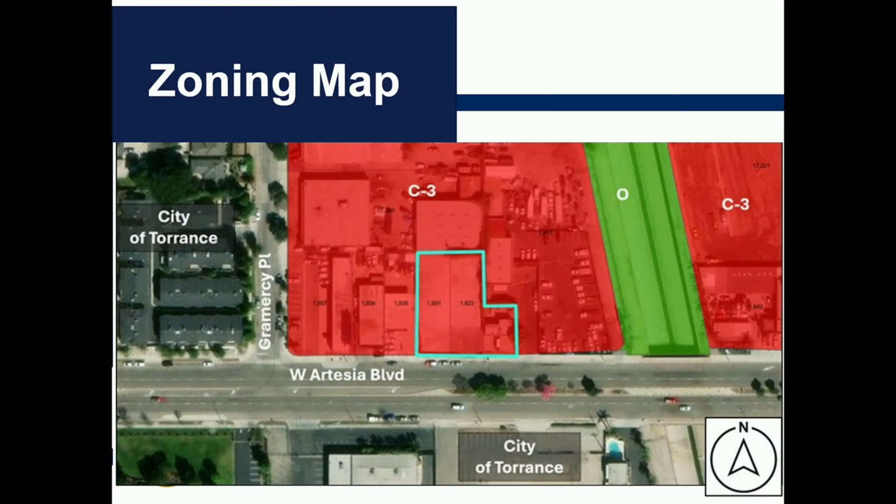The map here shows the zoning map, and outlined is the subject project property. As you can see, the site is located in the city's C3, that's the General Commercial Zoning District, and is surrounded by the same zoning designations on the north, east, and west. It should be noted that on the south end adjacent to the property is West Artesia Boulevard, which falls under the jurisdiction of the City of Torrance.

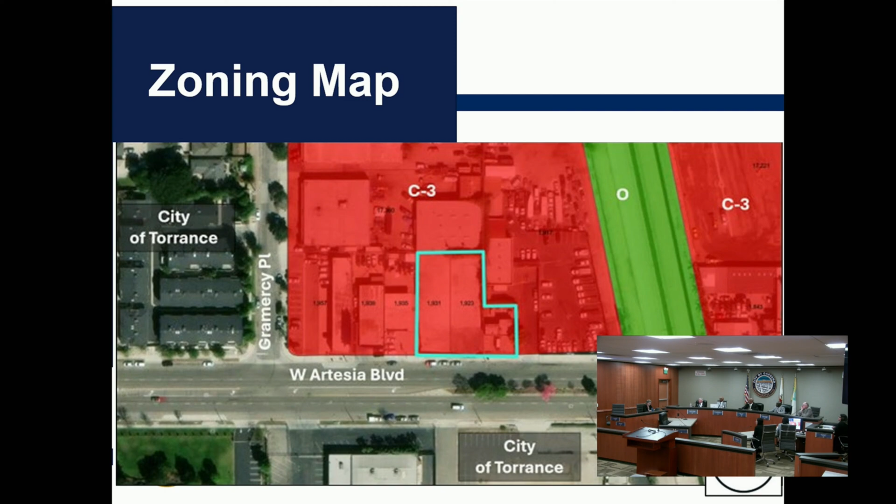So again, the proposal tonight is for a new facility located just west of the current location of the existing facility, because due to the continuous need for the operations of the facility, the proposed upgrades would need to be located nearby. So 1931 and 1923 are the locations for the new facility.

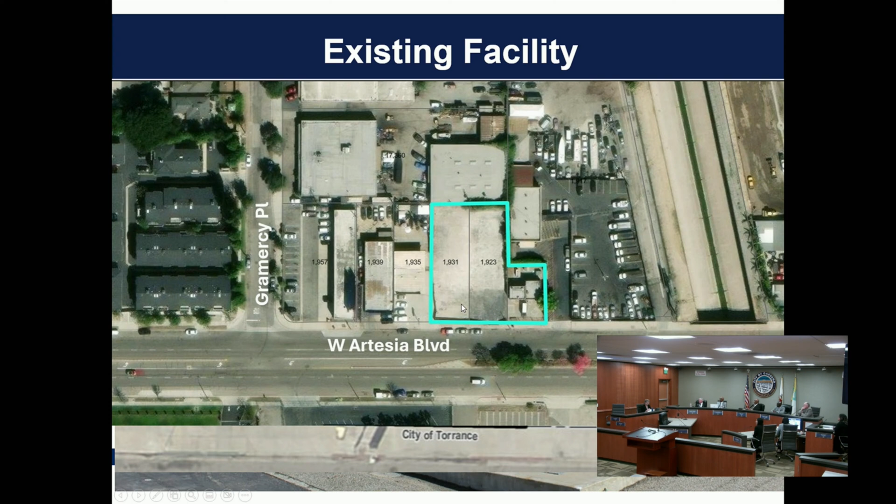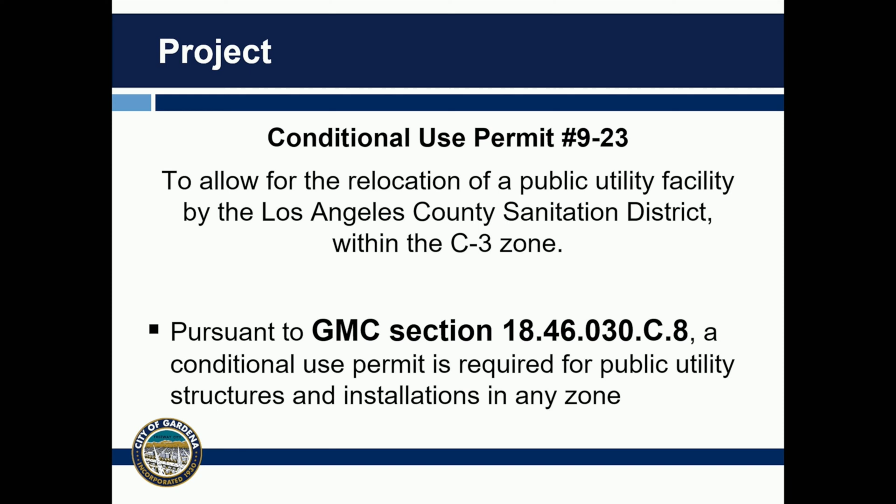So as mentioned, the applicant's request is for conditional use permit number 9-23, to allow for the relocation of the public utility facility by LA County Sanitation District within the C3 zone. And this is being brought before you because pursuant to the Gardena Municipal Code, a conditional use permit is required for any public utility structure and installation in any zoning district.

So to go into the details of the proposal, the new facility will include the construction of a 4,000 square foot building with a height of 35 feet. The Gardena pumping plant, the existing site, and the proposed facility will continue to operate and service not only Gardena but surrounding jurisdictions.

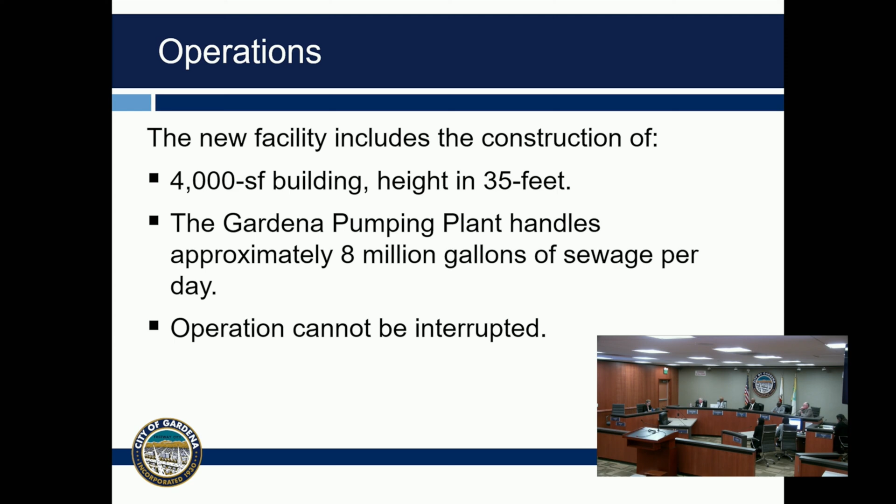As mentioned, the operations cannot cease; it's vital infrastructure to the city and to surrounding areas. The conditional use permit is for a new location, so that's what triggers the conditional use permit requirements. And as mentioned, the new location is adjacent to the existing site.

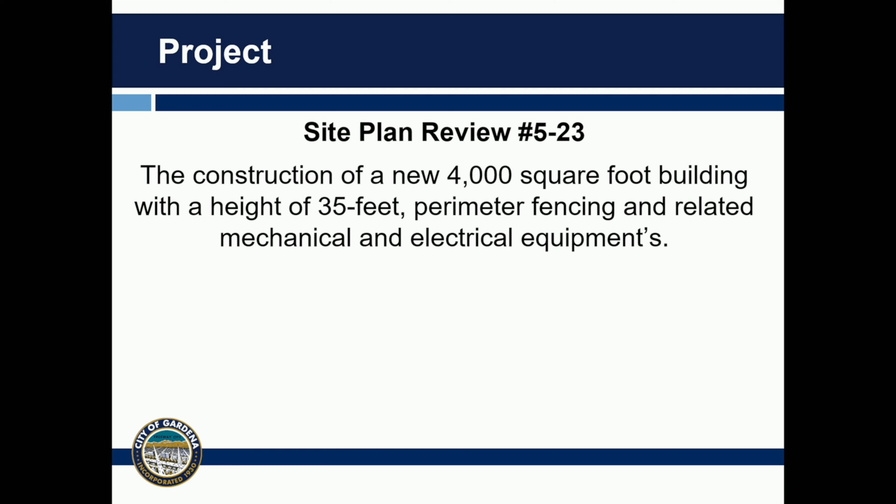As part of the request is also for a site plan review, again, for review of the proposed development. In accordance with Gardena Municipal Code, anytime there's a request for a discretionary permit, so like a conditional use permit that involves new development, City Municipal Code calls for a site plan review to be reviewed and presented before the commission.

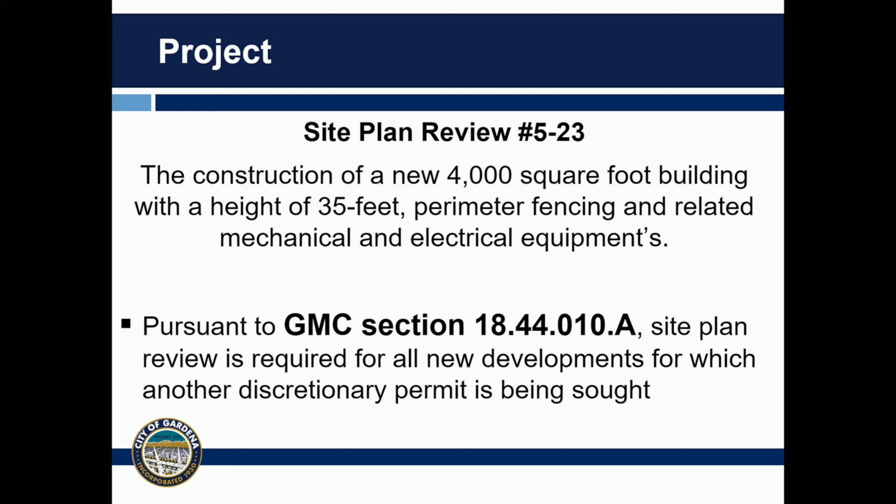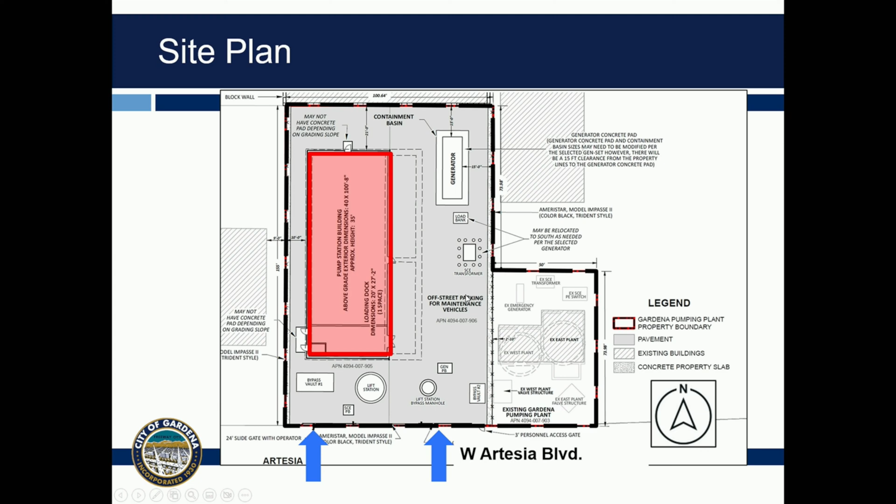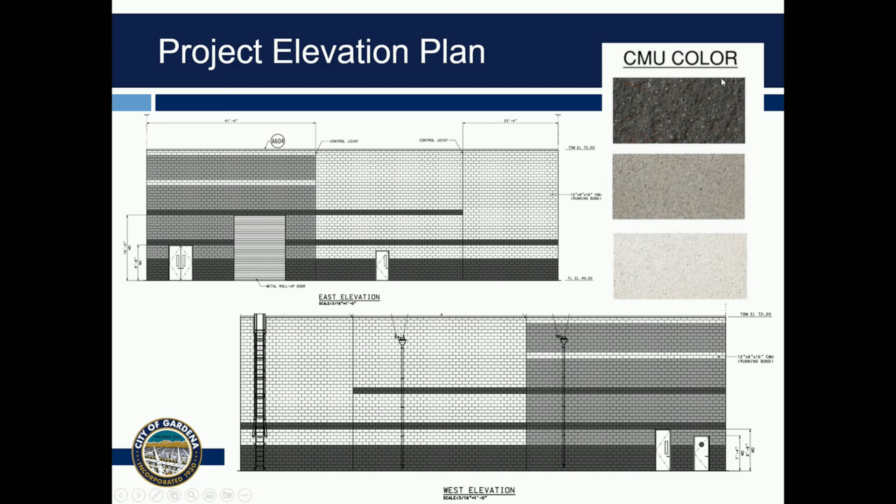Shown here are the proposed elevations for the new facility, the east and west elevations of the site, with the proposed brick material and colors located on the right. As part of the proposal, there is a new perimeter fencing. With details we'll go into in just a bit in regards to the variance request, the applicants are proposing an 8-foot high fence along the front perimeter line that will be wrought iron and integrated with brick material that will match the structure approximately every 8 feet or between the vehicle gates.

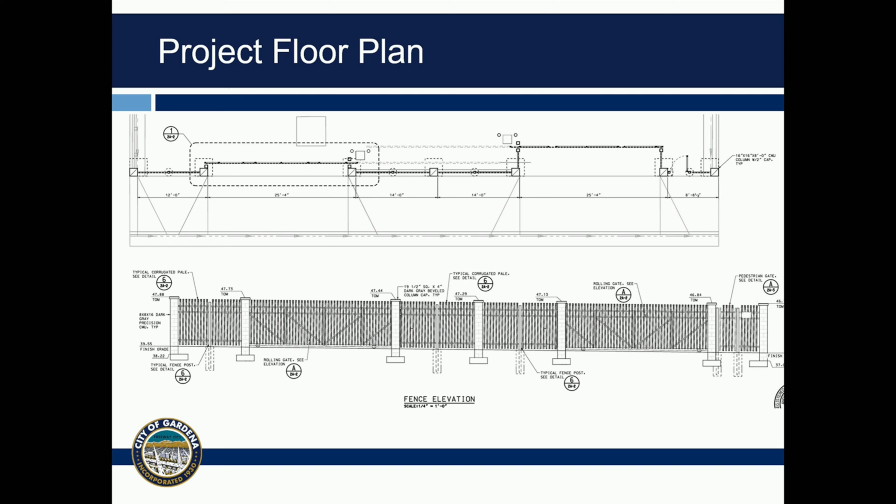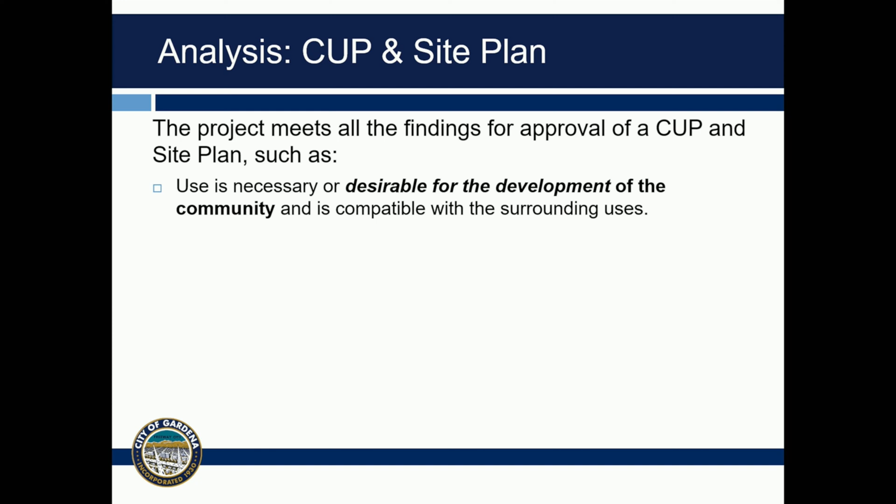So as part of the project request, staff reviewed the request for conditional use permit and site plan review and found that the project met the minimum requirements for approval, including that the use is desirable for the development of the community. Obviously, this would be a benefit to the area, providing better services throughout. The development is consistent with the intent and purpose of the city's general plan. An environmental document has been prepared and findings were made, and we'll go into that further in the discussion.

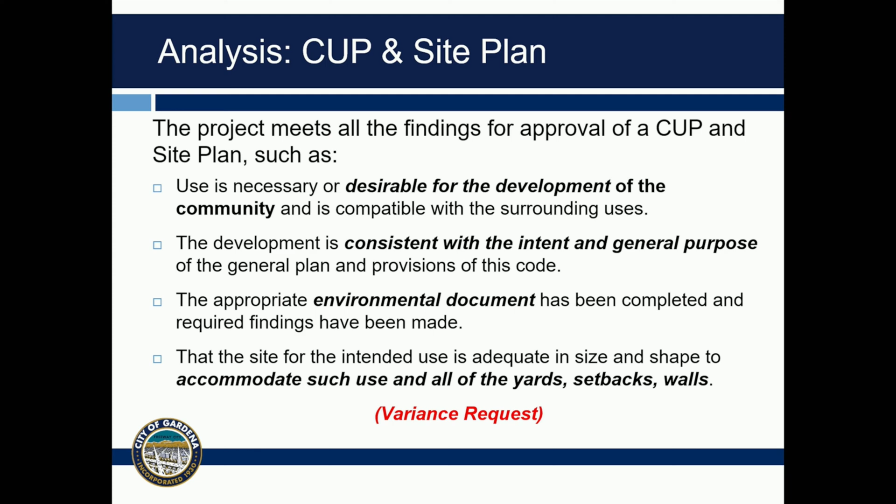However, as noted later on, the site for the intended use is adequate in size and shape and does accommodate such use in meeting all the minimum development standards, except for those requested under the variance tonight. So I'll go into that. So again, noting that all the other minimum development standards are being met, so setback, height. These requests under variance number 1-23 are the three requests, one being for minimum landscape setback requirements, the other for an increase in the fencing height within the front yard setback, and lastly for variance on the rooftop equipment and screening.

So the first is the landscaping along the street frontage. Gardena Municipal Code requires a minimum of 10-foot landscape perimeter to be provided along all street frontages for any commercial or industrial property. This property is in the commercial zone, so there would be a minimum requirement for a 10-foot setback on the site dedicated to landscaping. It should be noted that the building itself does meet this minimum setback requirement of 10 feet. It exceeds it. It's set back roughly 20 feet from the front property line.

But to adhere to minimum setback requirements for this to be dedicated to landscaping would be infeasible for the site, as it wouldn't meet the minimum turning radius requirements. And because the facility needs to be located adjacent to the existing one, this is the only site, and so it's physically constrained from meeting this minimum landscape requirement.

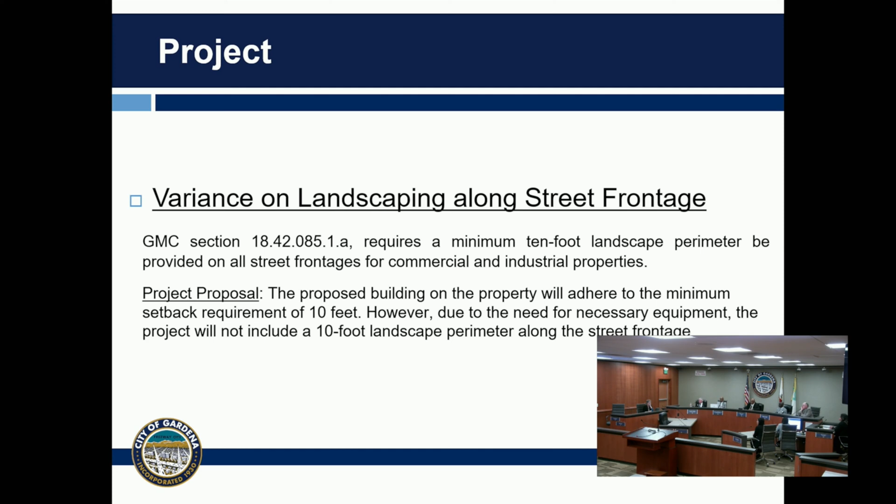Similarly, the Gardena Municipal Code requires that in the front yard setback, 3.5 feet is the maximum height for any fencing, wall or hedge. To securely enclose the equipment in the facility, the applicants are proposing to have an 8-foot high fence, the one shown in previous slides, along the front property line, which will have pedestrian gates as well as vehicle gates.

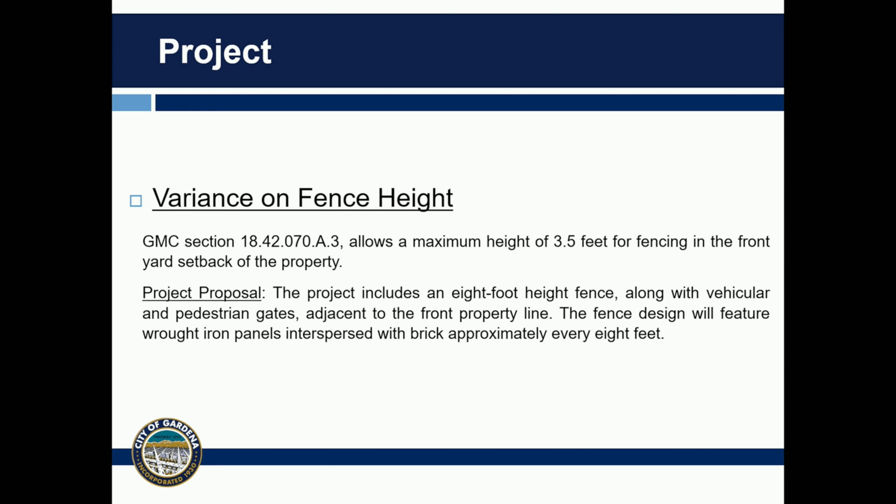And lastly, the request for variance from the city's minimum requirement for rooftop equipment screening. Gardena Municipal Code requires that all equipment, mechanical, plumbing, heating, cooling, on the roof or on the ground shall be incorporated into the building or be screened on all 4 sides with solid material, so that no part of the equipment is above the enclosure or screening.

The equipment on top of the proposed building stands 76 inches off the rooftop, but the parapet reaches 46 inches. So obviously it doesn't reach all the way up to the top of the equipment, but the equipment is set back from public right-of-ways to not be visible from those areas. And the reasoning for the parapet at that size is to meet fire code requirements.

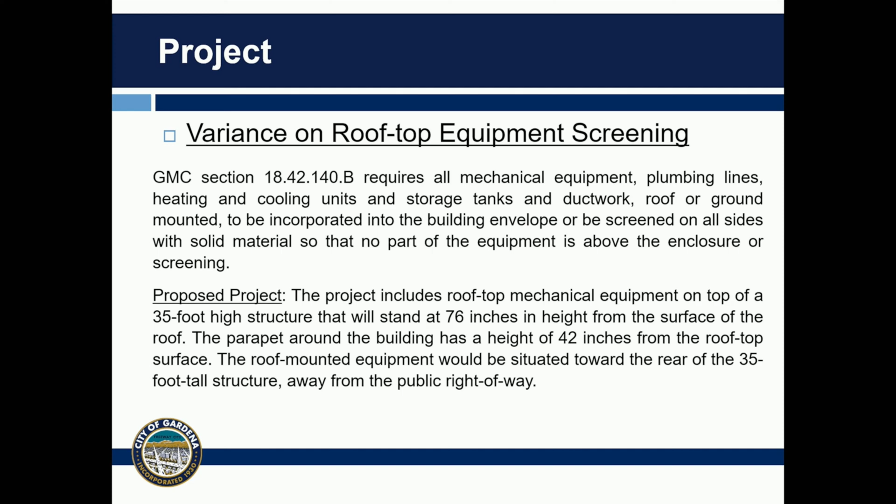So those are the entitlements being requested tonight. As included in staff's report, under the environmental consideration, LA County Sanitation District adopted an initial study and then a mitigated negative declaration in June of 2019, along with a list of mitigation measures that were listed in a reporting program that was adopted by the county in 2019. And in March of 2023, an addendum was prepared for changes to the project, which includes the project as it's being proposed tonight.

And under those environmental documents, the city is considered the responsible agency. And so as the responsible agency, the city is required only to certify that it reviewed and considered the MND for the project. And as shown in staff's report, staff found that the CEQA document that was prepared for the project was adequate.

Tonight's meeting is a public hearing that was duly noticed in the Gardena Valley News and mailed to owners and occupants within a 300-foot radius of the site. To date, there have been no comments received by staff. So the commission is being asked tonight to consider the request for the entitlements, which include a conditional use permit, site plan review, and the variance request. In addition, under the adoption of the resolution that has been prepared, we'll certify that the commission reviewed and considered the MND and the addendum prepared for the project.